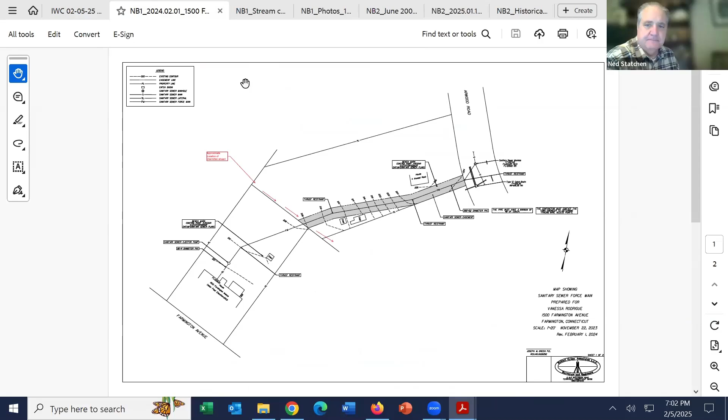Our first item on the agenda is 1500 Farmington Avenue. Is the applicant here? If the applicant can summarize, I know we got that cross-section sketch with a little more information, but just refresh and give us any additional information you've had, or a summary. Vanessa, either the applicant or her contractor, can give you a description, just a narrative of what's been going on.

I purchased my house in November of 2022. My installer at the time did an inspection during the buying process and determined that my distribution pipe was cracked. We went ahead with getting a tank only and a replacement of the distribution pipe. During that time, my installer said there was no leaching fields to connect to. We continued with soil testing in February of 2023 with Joe Green, and the Farmington Valley Health District was also there. We determined that my soils were unsuitable and the best option would be to connect to city sewer.

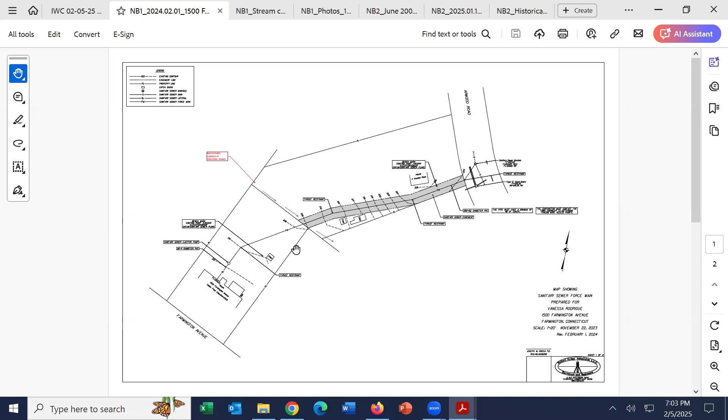There are no city sewers on Farmington Avenue, so I was lucky enough to ask my neighbor, who accepted to do an easement through their yard and connect onto the city sewer on Arwood Road in the Highlands behind my property. I went to a WPCA meeting in March of 2023 and they provided approval.

I took some time to get Joe Green to submit a plan to the town that was approved after a revision, and we've just been trying to get someone to do the work from then on. I believe it was approved in maybe February of last year. I might have the time wrong, but we've been looking to get someone to do the work. I was originally going to have Ben Bear from Bear Construction, but he kept pushing due to a big project, so I hired Fenn Construction to do the work. And that's where we are right now.

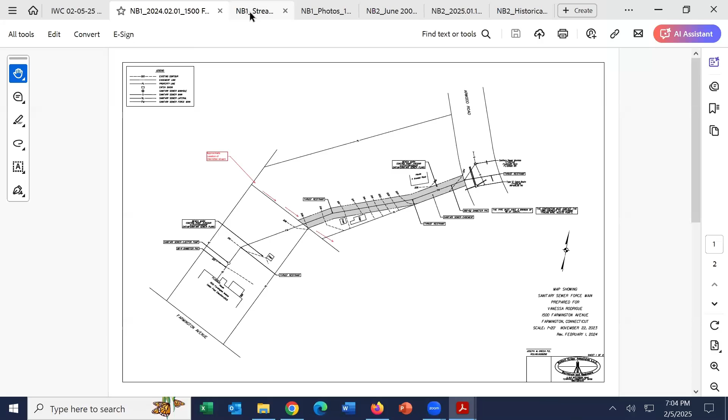And you have the full cooperation of your neighbor behind you that you're running the line through? Yes, I worked with attorney Pat Scully to get the easement documents obtained. They signed off, she's very aware. I keep her updated with every decision and whatnot that we have to go through, so she's very aware of everything. Okay, thank you.

Is your contractor here? I'm not sure, I sent him the link. I don't see him on the list. So I can give a brief explanation of his cross-section if you'd like.

From my understanding, he's going to be digging a trench 42 inches deep for frost protection. The pipe is 1 1/2 inch, and it's going to be connected to a grinder pump that's going to pump up; the grinder pump is located in the middle of my property, and then the topography goes up. He's going to be excavating, pushing that material to the side, and backfilling with that same material, and then he's going to have hay bales to keep it structured.

And then I also see he has, and this is on my property, Typar fabric that he's going to be laying above the pipe, and he also has sand and gravel on my property, so he's going to be backfilling with that first and then using the original soil that he excavated. I think we have an understanding of what you would like to do.

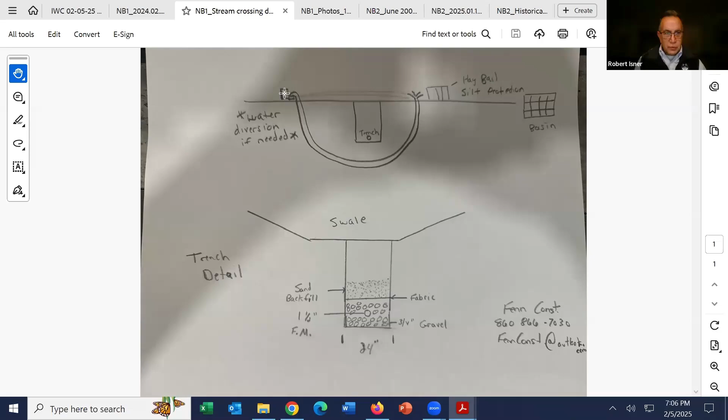Robert Isner: No question, just that we talked last month about basic construction practices, doing it during a low flow period, coordinating the work with the town staff, and using soil and erosion control to restabilize the area, so I don't have any concerns about the project. No comments. Neil Kelsey: nothing from me at this point. Mark Simpson: No questions. Jay Tulin: I also don't have any questions, it seems pretty straightforward.

The contractor was eager to get going but hasn't started any additional work away from the crossing swale. He took his excavator away after we got notified that we needed a wetlands permit, but we did have a hiccup where our sewage started backing up into our basement.

I assume it's due to the house sewer pipe being exposed. I had him come Saturday, and Farmington Valley Health District's Pat came Tuesday to check the pitch, but it started backing up into the basement and then into the shower. So he cut the original house sewer pipe and replaced it with PVC. I think the cause was a mixture of ice and roots growing into the original pipe. That's the only thing that's happened so far.

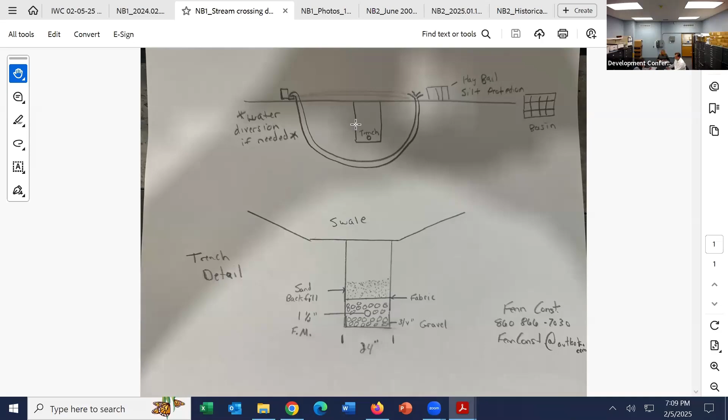So moved, Mark, with the conditions as stated in the review notes from the town. Okay, Mark, is that okay with you? Yeah, that's okay with me. I need a second. I'll second, Jay. All right, Jay seconds. The motion's been made to accept the application and seconded.

All those in favor say aye. Aye. Opposed? Abstain? Motion passes.

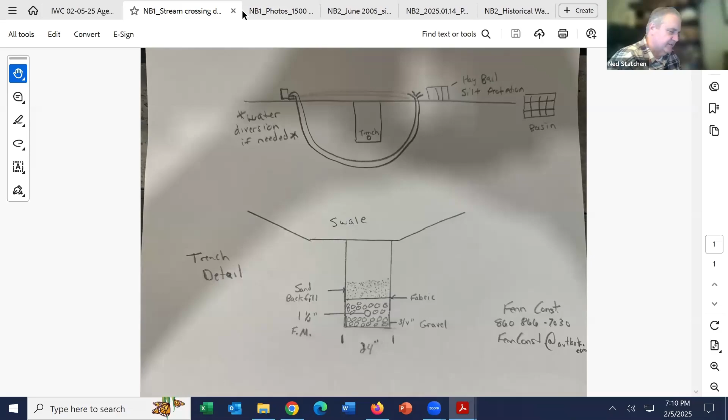Thank you so much, everybody. I appreciate it, and I will keep you all posted with my contractor and the work. You just have to keep Bruce posted as to when things are starting and give him a few days' notice before the contractor gets there, and work together with the town, and you should have no problems. Okay, thank you so much. Stay safe. Thank you.

All right, the next item on the agenda: Hillstead Museum, 35 Mountain Road, removal of invasive species work. Yes, we have David Perpeck from the museum on the line. Dave, are you there? Yes, I am. Can you hear me? Yes, we can.

Just a brief history: back in the early 1900s, this area was developed as what we call a walking garden, adjacent to the current sunken garden. There are some original photos from the early 1900s when it was active. Probably during the early or mid World War II era, when there were labor shortages, the sunken garden and walking garden fell to the wayside.

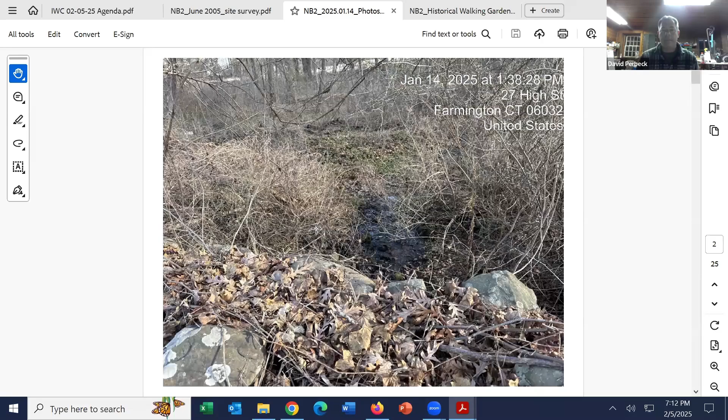So currently, I don't know if Bruce has a current picture, but it's completely overgrown with poison ivy, vines, any kind of invasive thing you could think of. As you drive down the driveway entering the museum from Mountain Road, you can see the house in the background, and everybody drives by this—at this point it's a pretty big eyesore. We don't have plans yet, but our goal is to eventually restore this to its former glory and give visitors another thing to do for walking, reflection, and spending time on the property.

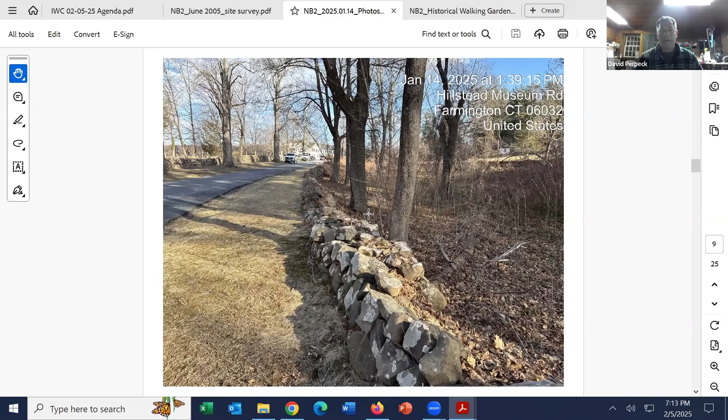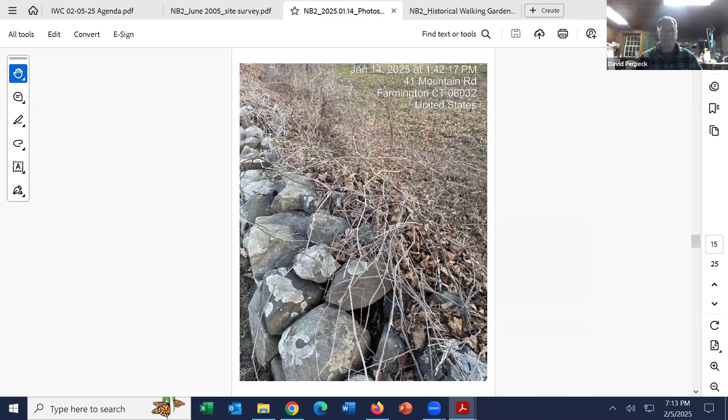We don't have an official plan yet, but our goal right now is to remove as much of the invasives as we can, clean it up, clear it out, and maintain it while we come up with a plan with a landscape architect and put some numbers to it, figure out what this will cost, and start raising some money. We do have some current funds now to do some clearing and removal, but there are stone walls that need to be repaired. It's a big project, but we want to clean it up to make it more presentable and let people get in there to assess it, put numbers to it, and come up with a plan, which we'd bring back to you at a future time. We don't have a time frame yet, but we'd come back with a formal application once we have a plan established.

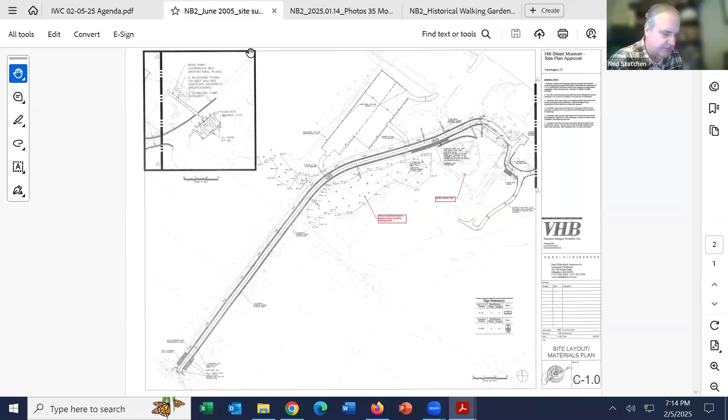Bruce, do you have anything that shows where the wetland area is, in regards to the area they want to do some clearing? All right, here it is. So Mountain Road is down here, here's the long access drive coming in, here's the house, and the sunken garden is up by the house. This is the area right around that bend in this area.

Wetlands were flagged - I think it was back in 2005, when we did the road work here. Yeah, 05, as part of the plan to redo some parking in here. So as part of that, they did this wetland flagging in that whole area, and that is the whole area of the walking garden at this point, not the sunken garden.

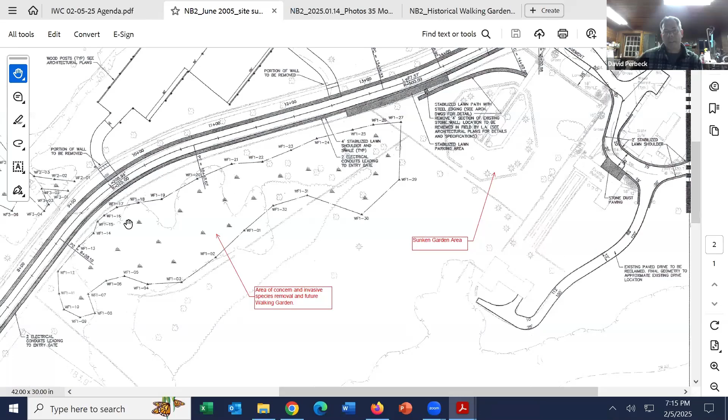I know we walked in there, and the most northerly, probably the first 60 or 70% of the walking garden, the north side, is usually always really dry. I know it's still designated wetlands. To the southern end is where there's the culvert that goes under the road, and then there's the easement that goes down to High Street.

I'll give a little aerial view. So there's the sunken garden there. This is the sheep meadow, a field for the sheep. Here's the old walking garden, and there is an intermittent water course that comes down through here, runs along the edge, goes under the road here, and then meanders down into High Street at this point.

Is part of your removal going to have anything like a mini excavator? No, I think it's going to be a mixture of handwork, and my contractor has a mini excavator with a small grapple claw on it with rubber tracks. We're thinking now is the time to really do it based on the ground and soil conditions - it's dry, it's frozen. In the spring it gets much wetter in there. So most of it can be grabbed from the high side, and we can sneak around where that main wet area is, and whatever we can't get with the excavator, we can do some handwork as well.

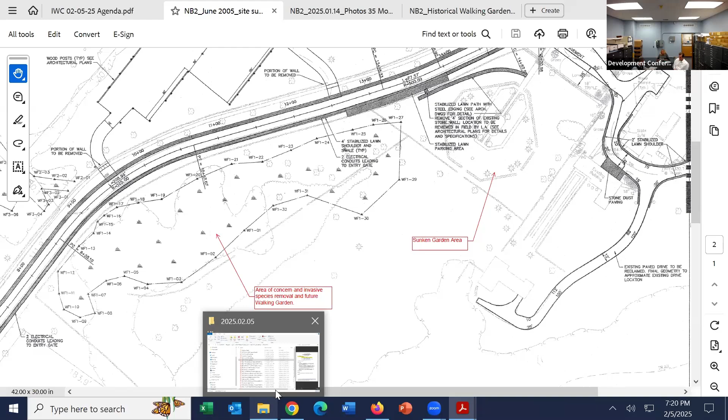What the intent of the application right now is just to remove the invasives in this area, that's it. That's all they want to do right now, because they did get a donation to do some preliminary design on this. So they want to get the invasives cleared out so they can at least see a little bit better what needs to be done, the amount of work, and then from there come up with a plan. And as we said, they'll be back at some point in the future with a plan, with an actual application for the full rebuild of the walking path.

Okay, that's the only questions I have. Thank you.

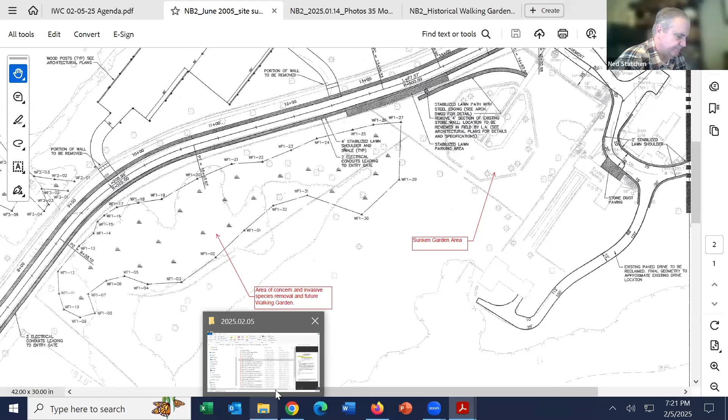I don't have a problem with having this as a non-regulated use, particularly with frozen ground conditions. So get it done as quick as you can, I guess.

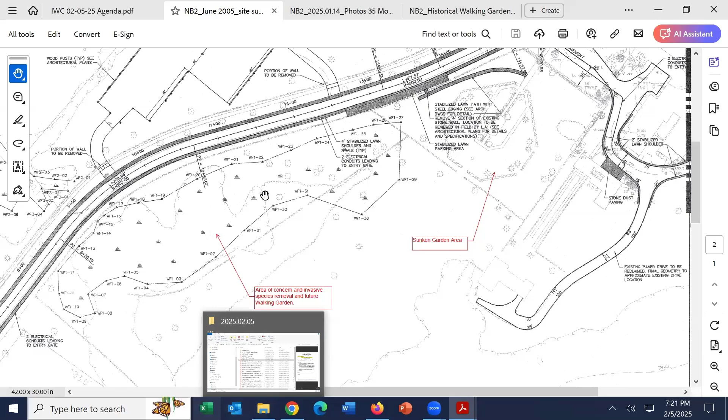In the long run, this is supposed to be a walking garden, and I guess it's called a forested wetland at present. Is it going to be shade species, or is there going to be some clearing that has to be done to support a garden? Something to think about as this progresses.

Yeah, there are many trees in there. There are definitely a couple that are not in great shape. So, yeah, I understand your point.

Okay, and when you come back with a plan, maybe 20 years is quite a long time. You'd probably do another wetland delineation and have the scientist give us the functions and values of what the wetland is. But that's for the future. What you're proposing now is fine.

Thank you. Thank you, Dave. Robert Eisner.

We come back to Robert. Yeah, sometimes his screen freezes. Let me see, is he muted? Yeah, he's muted. All right, Neil Kelsey. Oh sorry, my fault. No problem.

Go ahead, Rob. Conceptually, I agree it's an as-of-right activity, but Bruce, is there a limitation on the acreage that falls under the exemption? Not for this section. Let me grab my book. Hold on. Okay, and that's for checking the incidental use, that's for like incidental use such as a pool or anything like that, here, 4B.

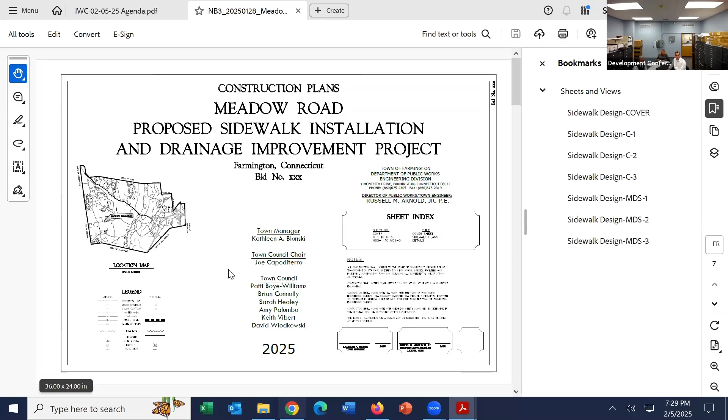Okay, next item, Town of Farmington, Meadow Road, regulated activity in the upland review area for sidewalk project. Is that gonna be you, Bruce, or is it the engineer? Nope. Good evening, commission members and chair. My name is Dylan Riley. I am one of the civil engineers for the town. I'll be presenting the Meadow Road project tonight with the highlighted focus on the 3 areas where we cross the wetlands.

The Meadow Road Sidewalk Project is a sidewalk project building a new sidewalk stretch from New Britain Avenue to Wisteria Lane. We will be crossing Judson Lane with new ramps. There is one culvert crossing that requires our attention. As part of this project, we plan to upsize the outlet end of the pipe only, from a 36-inch RCP pipe to a 48-inch RCP pipe.

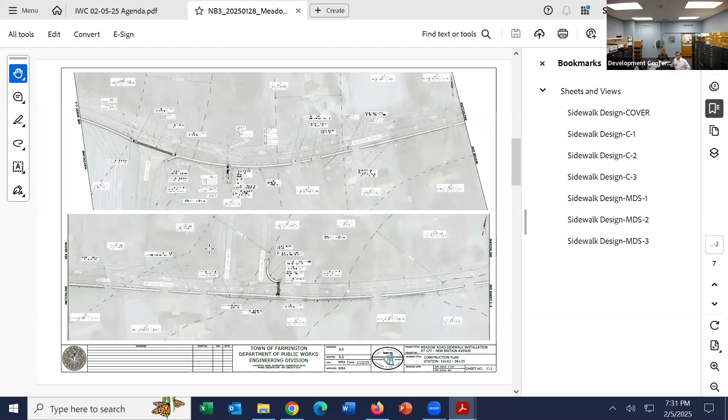Could you go to the plans? Thank you. Throughout the project, we cross the wetlands at 3 points.

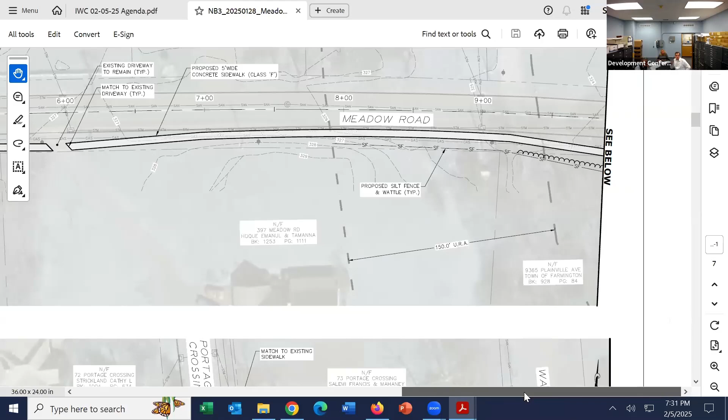This is our first crossing where we start at Wisteria Lane. We enter the Upland Review area at Station 8. Station 925 is roughly where the wetlands start. In that area, we have to pull back the sidewalk from the road a little bit due to elevation change just off the road, so we'll be utilizing silt fence and straw wattles to contain any disturbance and erosion within the project limits and off of the greater wetland. There are a couple of utility poles in our way, forcing us to move further away from the road in this area, that accompanied with the grade change, as drastic as it is, so close to the road.

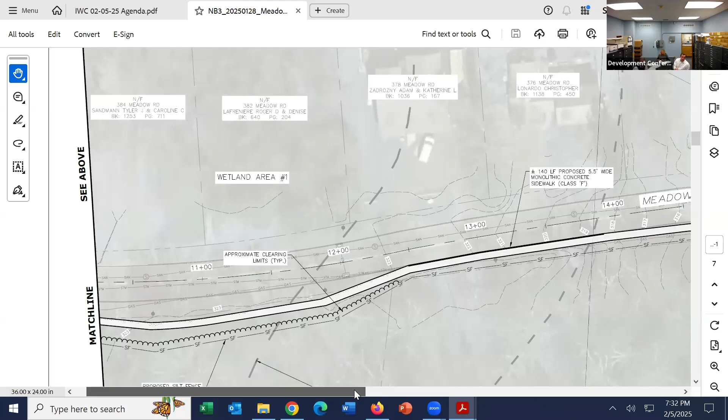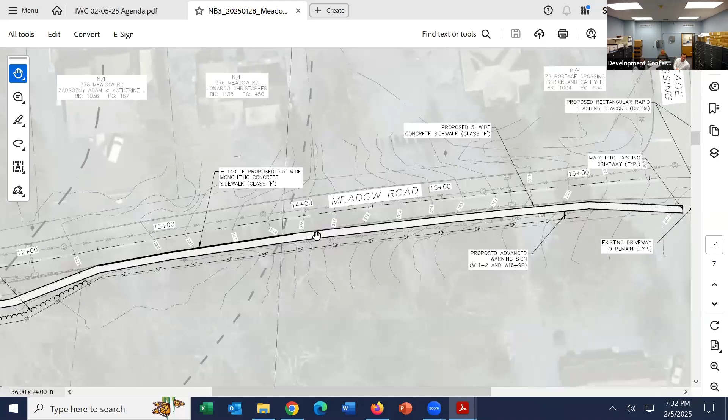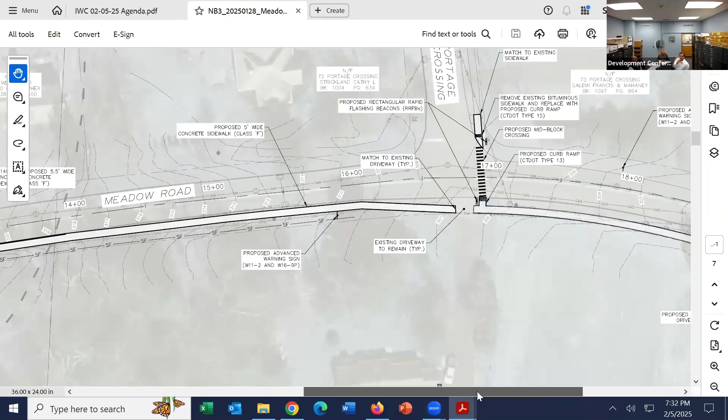We move out of the wetland review area at station 12 and out of the upland review area around station 14, where we're able to come back to the road. We then continue along the road for the remainder of this stretch till we reach our next wetland around Judson Lane.

At this particular point, around station 21, we enter the upland review area. Around station 2250, we are in the wetlands area. At this area, we are pushing the sidewalk as close as we can to those utility poles to keep it away from the edge of the embankment for the road.

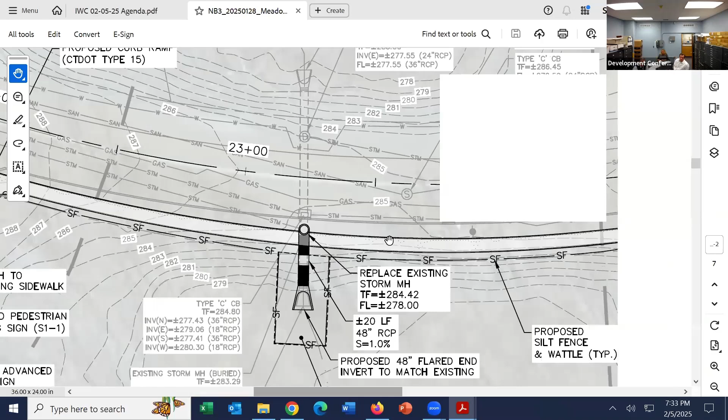Fill will be used as required during any field work. Silt fence and straw wattles will be utilized to contain all loose material onto the project site and within our green belt. At this location, this is where our culvert crossing is. This culvert accepts a lot of water from Summersby, Portage Crossing, and elsewhere along Meadow Road.

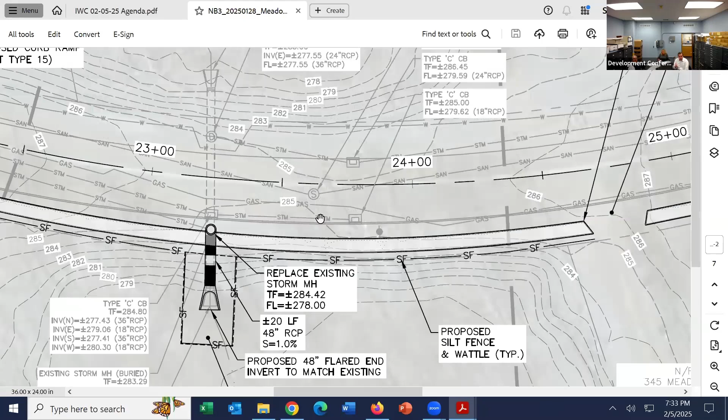Oh no, I put the wrong application, sorry. That's right, photos for here, we go, right here. Storm drains outlet, here we go. That's what I was looking for.

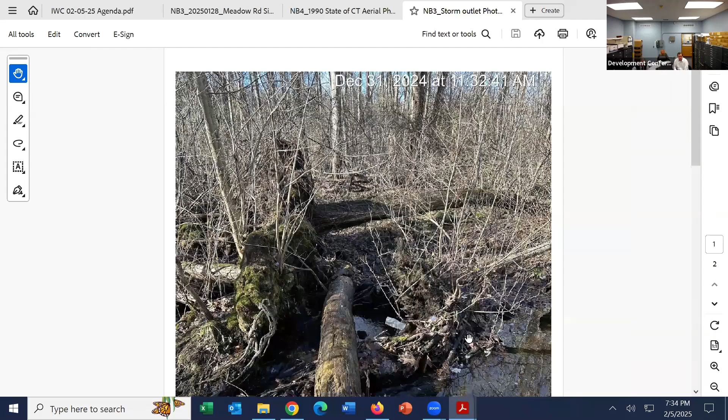These are primarily downstream photos, probably 50 yards from the outlet. You can see it's a small, really intermittent water course. It doesn't really flow all of the time. In fact, just recently, the inlet was completely frozen, so the water's not flowing through there very fast at all for it to freeze, and it froze pretty solidly. I myself was walking on it at the inlet.

The outlet that we plan on doing the work to is being done to reduce flooding on the northern end of Meadow Road. The property there has a shed that sometimes can get inundated with water during high volume storm events. It's the shed right there at the end of the driveway, Bruce.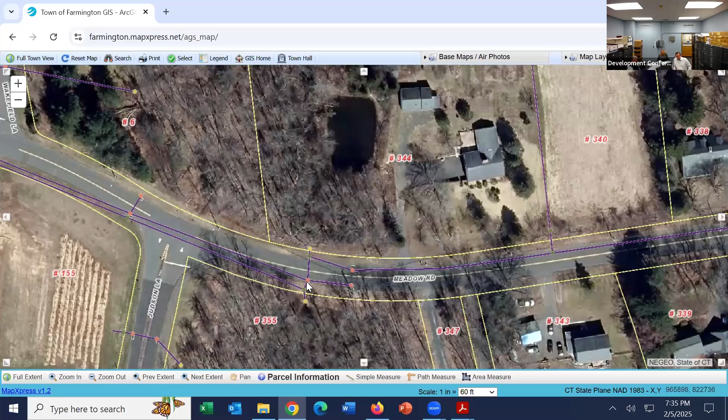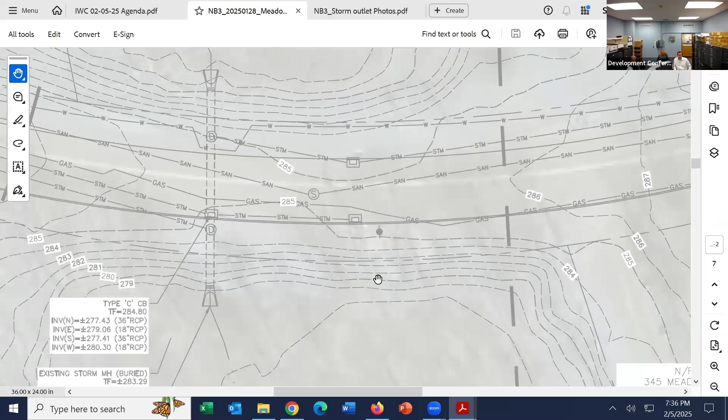The reason we're only upgrading the outlet pipe is because from Portage Crossing, there's a 36-inch, the most southern storm drainage line with the green dots, is a 36-inch RCP pipe coming from the Portage Crossing development. That intercepts the 36-inch RCP crossing at that green manhole. The green dot indicates a manhole structure. So we'll be changing out that manhole structure with a larger structure to accommodate the 48-inch pipe, and upgrading the outlet to provide more relief on the outlet side with the 36-inch pipe coming from Portage Crossing, to relieve any backup from before that point.

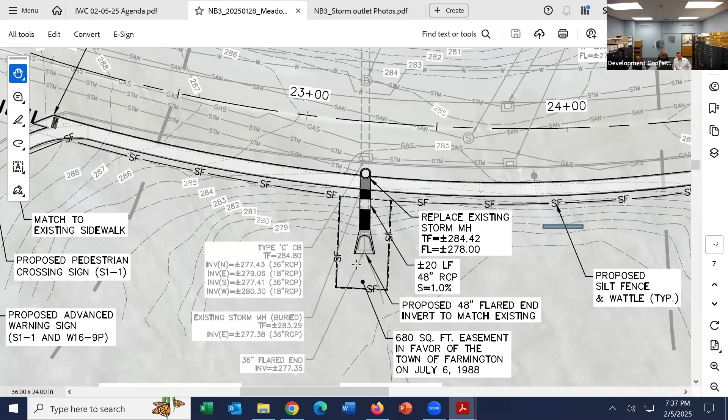So the regulated work here is really just removing the existing pipe, flared end and manhole structure and placing new structures in. The new pipe will fall in the same footprint as the existing, just a slightly larger size. We will not be doing any work in the plunge pool. The plunge pool existing is heavily silted in; in talks with CT DEEP Fisheries, that's how they prefer it. They actually prefer us not to put riprap in any body of water really anymore for fish passage. So that work will not be done as part of this project. We will just be upgrading the outlet structure.

Is that flared end concrete or plastic? All components will be concrete. Okay, yep.

And oh, I'm sorry, continue. No, it's fine. And then just wrap up and show them what you're doing with the rest of it.

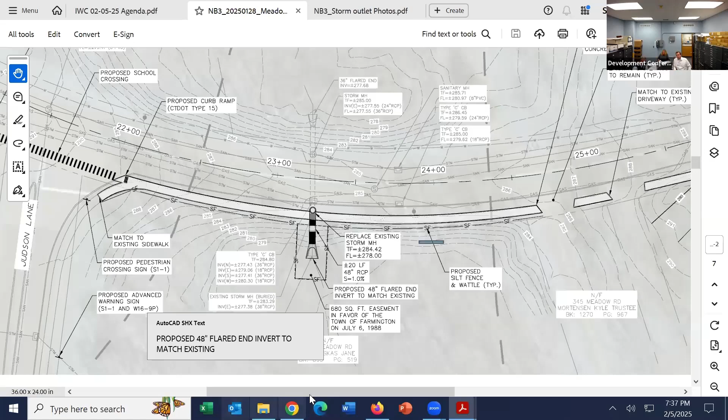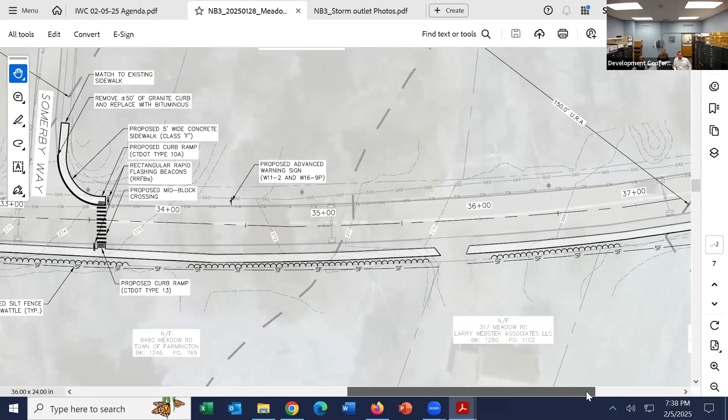That's all, we have one more crossing a little bit further on. This is just the upland review area after the pipe, but we have one more wetland crossing before we make it to the end of the project, just along this stretch in front of Somerby Way. Again, we'll use standard construction practices to keep erosion within the project limits and out of any unnecessary disturbance.

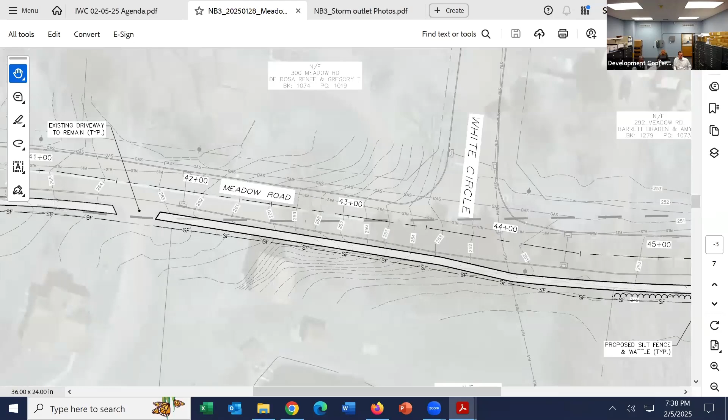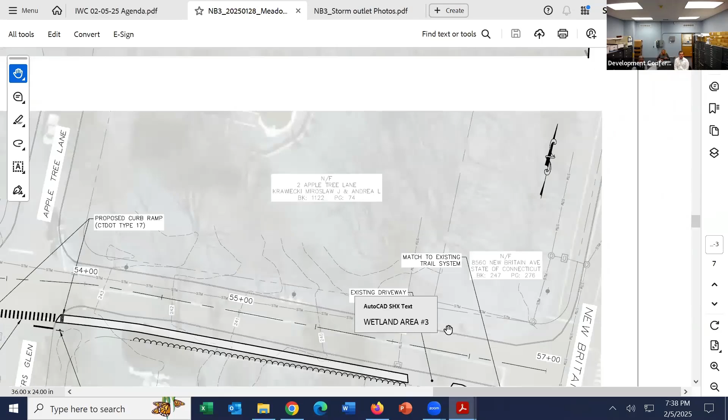No problem, and then this takes you to the end. Go back to here, crossing by Apple Tree, right? Yep, Apple Tree, and then tying right back into where? The trail, like right there. So, yep, so that's our project proposal.

At this point, I'll leave it to the commission for any questions and comments.

When do we think this work is going to be scheduled? It's our intention to go out to bid shortly, hopefully scheduling the work for sometime after end of school. Okay. All right, I think that's all I have.

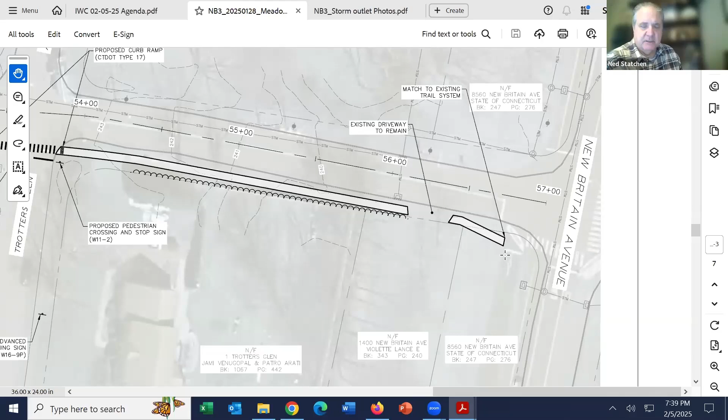We'll start with Rich Berlandi. Do you have any questions? No, it looks pretty straightforward. No questions, thank you. All right, Dave Fox.

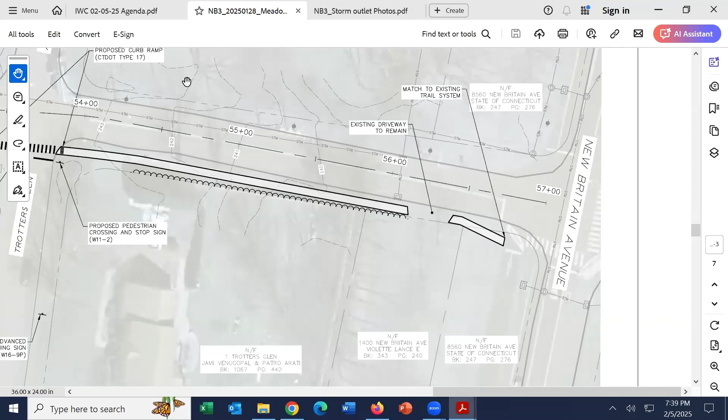Just kind of one picky question. I see on the application that it's 680 square feet of wetland impacts, but I think that's just counting the storm drainage area there, and you do have some crossings that probably aren't counted into that. And being on the side of the road, maybe they're really not wetlands anyway, but I don't know how that's handled from accounting purposes. It's not an on-ground field here, it's just the aerial wetland.

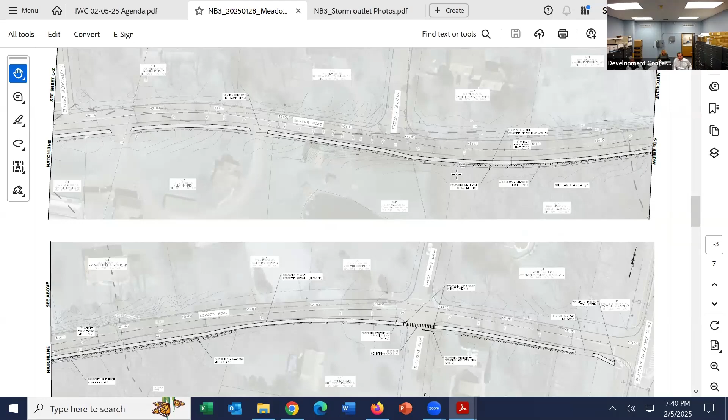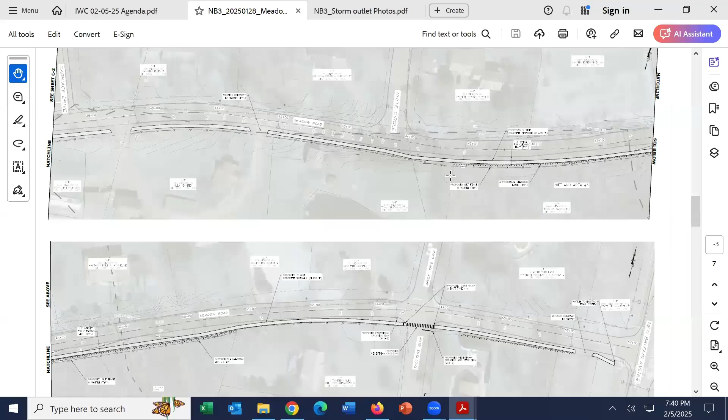Yeah, so our wetlands delineation is really just through the aerial views from the GIS website that we have, and the GIS mapping. They're not necessarily flagged, but the rough idea is that when you're that close to the road... Yeah, I understand. And I was looking at that, GIS shows pretty much all of Hind Farm as wetlands, so it's obviously not correct. Yeah, so again, no big deal. I didn't know if it was an accounting thing, but probably doesn't matter.

Yeah, we're really staying within the green belt along Meadow Road. We're not, apart from that one area where we separate from the road a little bit more than you normally would, but that's only because of how much higher the elevation along the south side of the road is compared to the road itself. Okay, it's much more cost effective to go up with the grade than it is to remove the grade. Okay, I'm done, thank you.

Thank you, Robert Eisner. Yeah, I think it's going to be a highly beneficial project for public safety purposes. I bike and walk on this road all the time. It has an east-west run, and when there are people on the road in the morning and at night, the sun is blinding for the driver. So I think it'll be a major public safety improvement to get people off the road, and so there's a small amount of wetland impact that may occur, but it's far outweighed by the public safety.

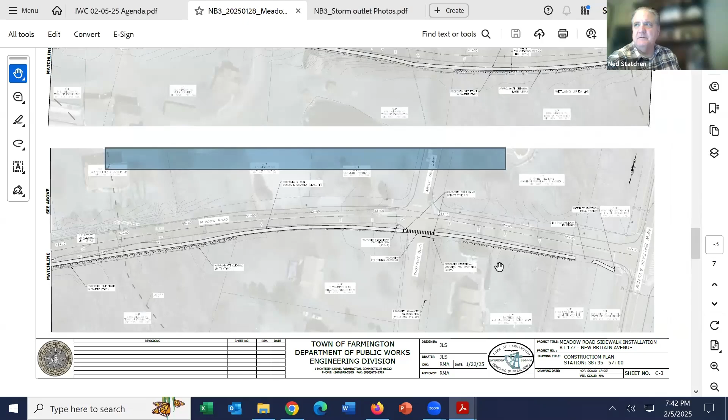I do have one question. Just west of the intersection with New Britain Avenue, it shows there's an existing driveway to be maintained. There is no driveway, go back to your on Meadow Road. Just a second, sorry. Yeah, when you have the profile sheets, you show that there's an existing driveway to be maintained. I think there used to be, when they first built that storage building.

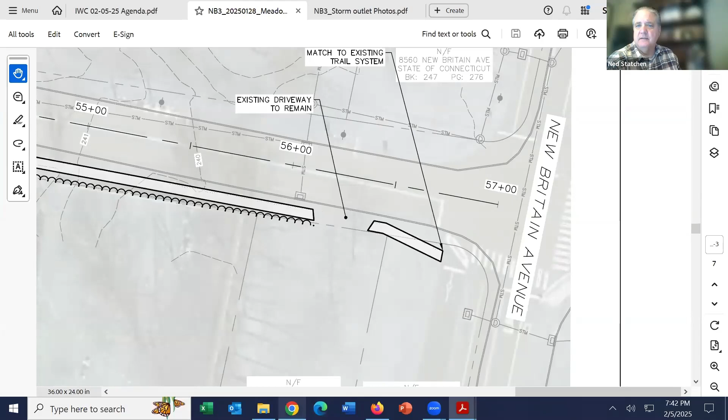But I think they've since, probably for security, so you don't have a one way out, one way in. Yeah, that's all grass. I mean, I've lived there for over 20 years, I don't think it's there anymore, never seen any vehicles. There's no gravel, no sign of any driveway. It's definitely gone, but if there's no sign of any remains of a driveway and there's no curb cut, then there's no reason to... Nope, there's no curb cut there. Good pickup, sir. Yeah, thank you.

We'll be filling that in with concrete for the sidewalk. Okay, end of my comments.

Hey, Neil Kelsey. Yeah, nothing from me.

All right, Mark Simpson. Yeah, I just was trying to read the application and I was a little concerned about the areas of wetlands being disturbed, but I think in this discussion it made me more reassured that if it's going by what's flagged by the town, by the GIS, I know those things it's not accurate unless somebody actually goes in there and does an evaluation, whether it's wetlands or not. So I'm pretty much okay with this project, for what the benefits are outweigh any disturbance. I agree, that's all, thank you.

Jay Tulin, I don't have any questions. I agree with all the beneficial, the benefit outweighs anything else, and I think it's a good project. Thanks. Okay.

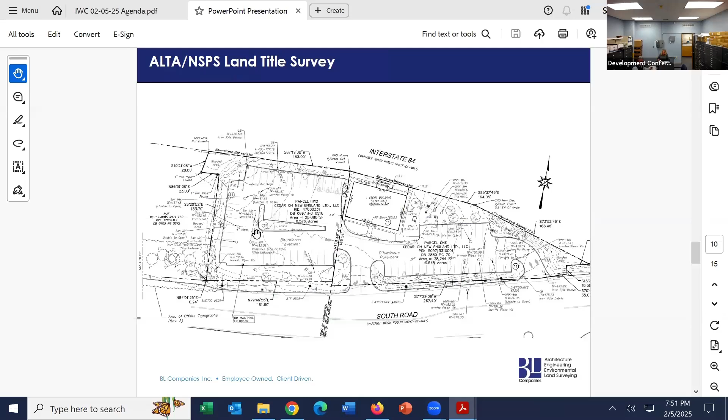So this is just the survey of the site as it appears today. We obviously have that existing Wendy's building pushed further back towards I-84, which is to the north side of the site. The parking lot is located to the front and sides. Half of the lot is located in Farmington, and the easterly half is located in West Hartford.

We did receive a permit from you back in 2022 for a drainage pipe located in that northwest corner where Bruce is circling right now. That water sheets flows out to the west, which is a current lot owned by the West Farms Mall owners, and it's in a conservation easement. So it's been wooded for quite some time, and that's where our stormwater from this site will be directed.

We are proposing to rebuild this whole site. That Wendy's is very original and outdated. If you can go to the next slide, please, Bruce.

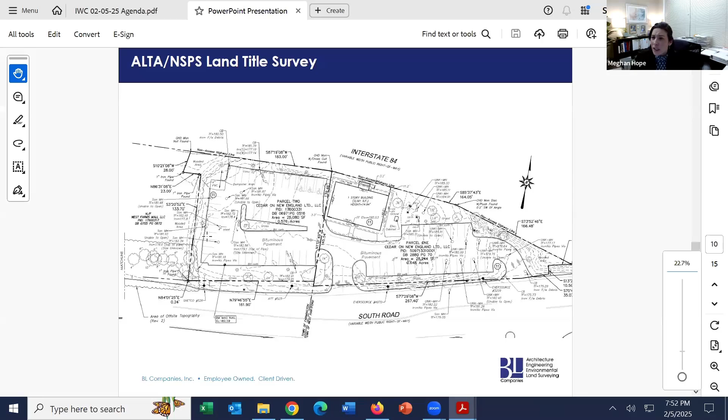Our proposal was approved by all the boards in Farmington, and then we went to West Hartford and got all the approvals we needed over there. But we're obviously pulling the building closer to the street. We don't need as many parking because there's less indoor seats now. We are proposing a drive-through, but this has all been approved and permitted.

When we did get the plans approved, the original proposal included getting rid of the existing septic tank, which is currently on site, and connecting the site to the sewer. We did get permission from Farmington to connect to their sewer, which is down to the westerly on Woodruff Road. It's about 600 linear feet of pipe in order to connect, but the client thought it was important to abandon the septic tank and move towards a sewered option for this site.

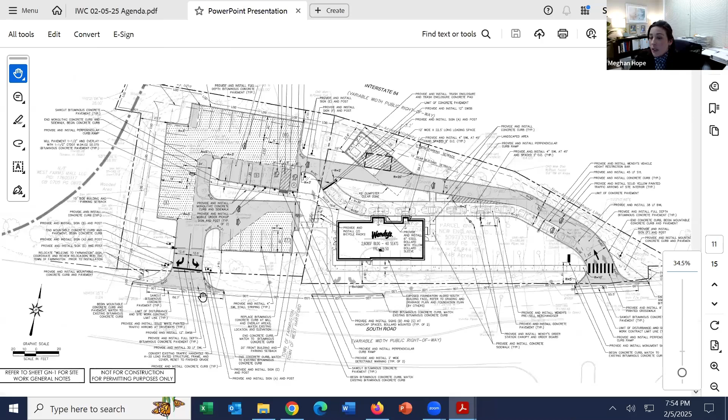Our original proposal had that sewer pipe located in South Road, so all within the pavement. And what our application tonight deals with is a change to that previous plan. What we're proposing to do is to put the sewer pipe within the adjacent lot. If you go to the next slide, Bruce, that should show it.

Yes, this one, thank you. So this is just, we were looking at the Wendy's site, and this is to the west. So we've slid down further towards Woodruff Road. You can see the parking lot over on the right side of the screen.

That'll be our new parking lot, and that outfall pipe that you permitted back in 2022 just clipped the limits of the 150-foot upland review area. So that red line that you're seeing on the plan is where we're proposing to locate the sewer pipe. The easement is 30 feet in width, and I'll have Gareth in a minute go through some of the more technical parts of it, but we would be proposing disturbance, obviously, within that upland review area.

There is some vegetation, and that would need to be removed in order to put the pipe in. We did have the wetlands delineated. Sagan did that in April, and those have been field located and placed on the plan. It's about 60 feet from that closest point of the wetlands to the closest limit of disturbance.

So in all, it's about 12,700 square feet of disturbance, which is proposed in the upland review area. There is no direct wetland impact or direct disturbance to the wetland soil. In a minute, we'll have Sagan go through his findings. He did do a function and values analysis. He also did review the site to see if there was a vernal pool, and he determined that there is no vernal pool located at this location, but he's submitted all those reports to the commission.

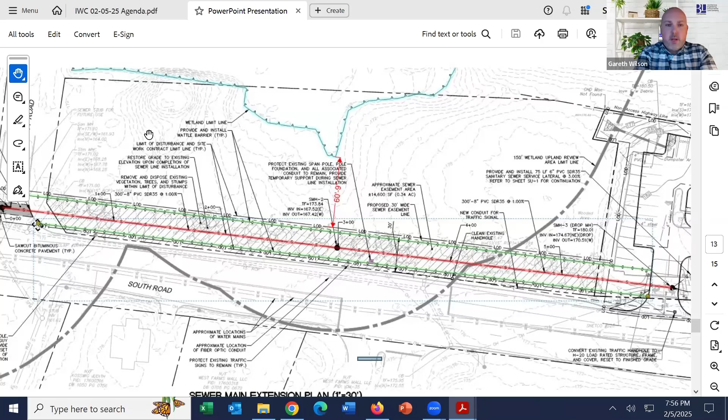Sure, thank you so much. Bruce, would you mind going back to the second slide?

Here we go. Perfect. So this is the area of proposed works.

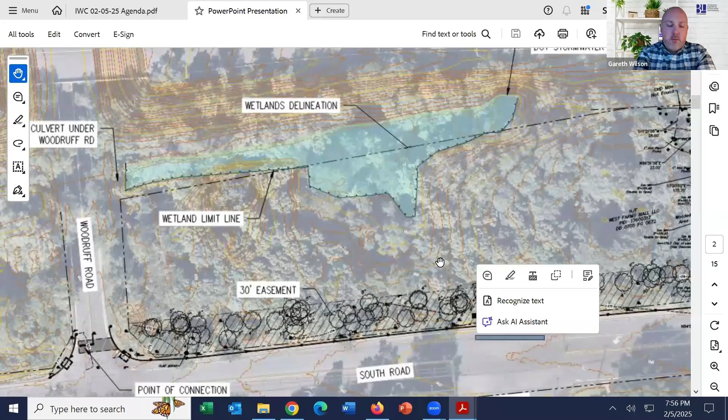We're hugging the road for a 30 foot easement along the length, approximately just shy of 600 feet. It's 600 feet chamber to chamber from our side to the point of connection on Woodruff Road.

As you can see to the north, and you're probably all familiar with, Interstate 84 drains down the south side, just off site of this parcel of land there, correct? And travels along heading west.

The ground also drops towards the center there, where you see the wetlands highlighted in blue. And like Meghan pointed out, we're about 60 feet from that proposed area of works. But just to give context, most of the water flows from 84, and of course some from the site as well.

Bruce, would you mind going back to the previous plan, showing the sewer in red and green and yellow lines? I'll let Sagan talk through the photographs and his findings.

So it's really 600 feet sewer connection, 3 chambers connecting on Woodruff Road. Previously, we were to connect just south of that connection point to a stub on the private piece of land, 9520 I believe it was, just south of, further left and south of where your cursor is.

So all the works were previously going to be proposed in the road. From a traffic management perspective, it's quite challenging - several junctions, a long stretch of road, and also beside West Farms Mall, so it wouldn't be ideal.

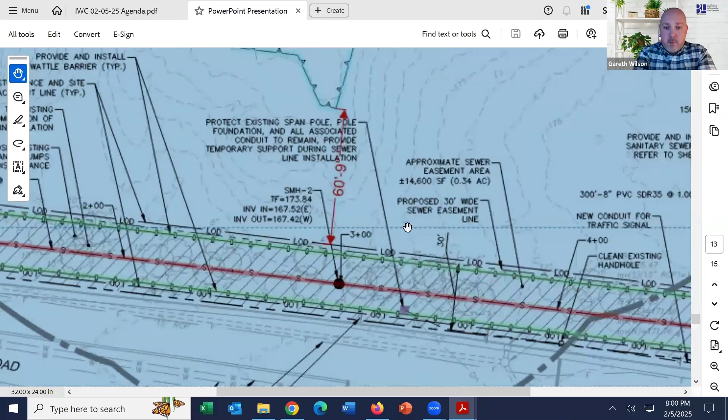There's one little obstacle there. If you see the central manhole, to the right of that, there's an overhead and a span pole in that location, about 6 feet away from our proposed trench.

So we have made a note there for that to be temporarily supported. We weren't able to find an exact detail for that, but looking at DOT standard details, we expect it to be around 6 feet, if not deeper, in that area, which would be deeper than the sewer is actually in that area. Our sewers range from 8 to 6 feet in excavation throughout that area.

Either side highlighted in green, the fence type is straw wattling, which we proposed for sediment erosion control. One of the staff comments asked us to consider silt fence. We're more than happy to add that to the plans, but we haven't updated the plans since submission, so we can certainly have that as a condition of approval.

Really, it's fairly straightforward in the amount of works undertaking: 600 feet linear trench, 60 feet from the wetlands, sediment erosion control, best management practices of course, and a shorter construction duration and less impact on the surrounding neighborhood and traffic.

I'm happy to answer any engineering questions now, or I can pass to Sagan to talk through some of the site photographs, the wetlands, what his findings were.

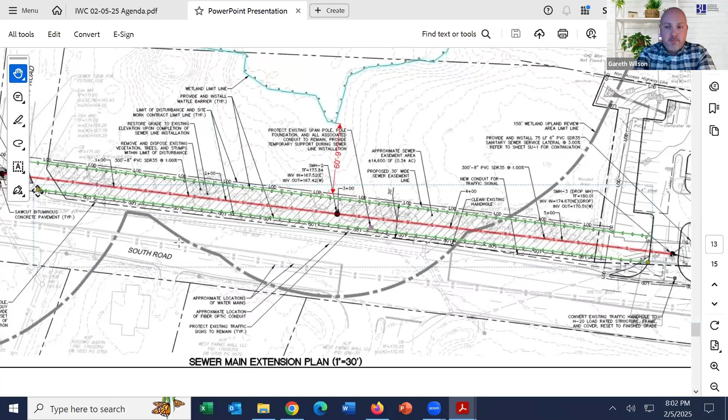Let me just let you continue, but I just want a clarification. So in 2022, the application was to utilize or replace the septic tank and use an on-site disposal, and now you're going to hook up to the sewer line.

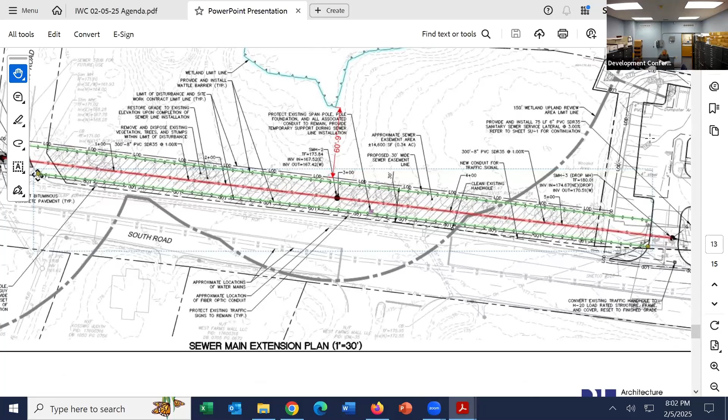Sorry, existing has a septic system. In the 2022 approval, we had the sanitary connecting from the site, connecting across to the left-hand side, similar route, but entirely in the road. So what we're looking to do is get approval to move it from the road into the neighboring lot, which is in the upland review area.

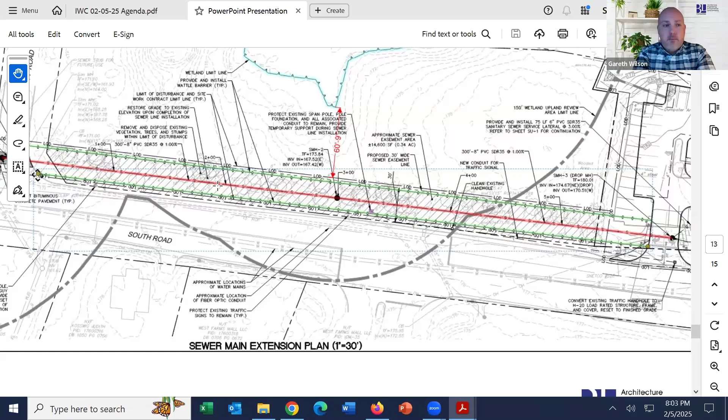Okay, thank you. Continue, please. I'll pass to Sagan, if you can walk through the photographs and your findings, please.

Sure, my name is Sagan Sumko. I'm the certified professional soil scientist and professional wetland scientist who worked on the site. If you want to go ahead and go to the photos, we'll go through them.

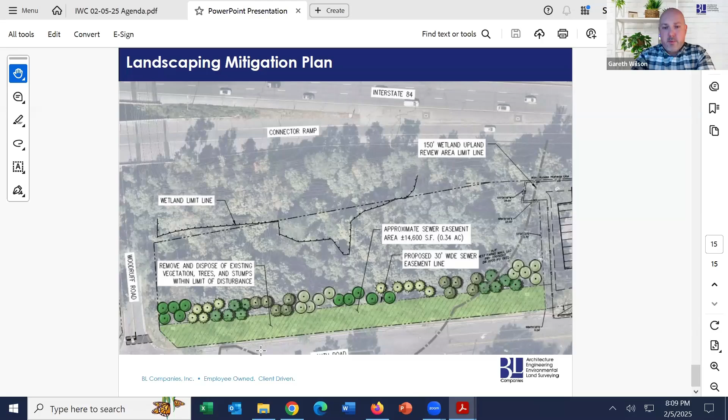Gareth, what is the proposed seed mix that's going over the easement? We obviously can't plant trees on top of the sewer easement, but is that going to be mowed a couple times a year, or is it like a meadow mix? I wasn't sure what we had been proposing there, but it'll be no trees in that area, correct? Correct, no trees. All the trees are outside of the easement area, so there's no intrusion of roots for any future maintenance issues. It will be a grass area.

Seed mix, yeah, it's a lawn seed mix. So the mix is Kentucky bluegrass 60%, fine creeping, fine leaf 25%, and ryegrass 15%. So a hybrid mix of grass, which can be mowed and tended as needed.

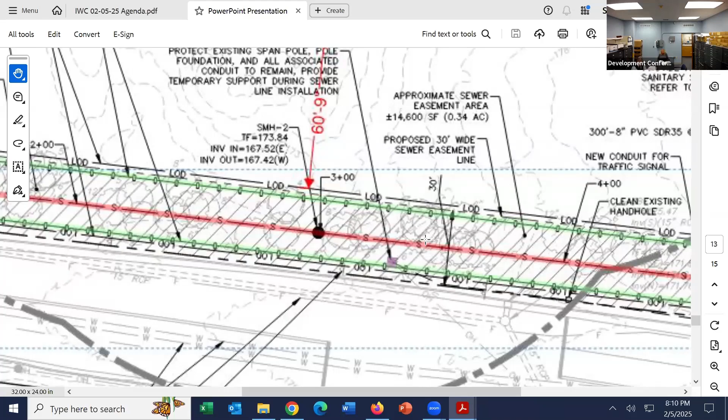You're probably talking about 35 to 40 feet off of the back of the curb. So I would assume that half of that would at least be mowed by the town, maybe during the roadside mowing program as they're going through. Because just as Commissioner Berlandi said, they would be maintaining this sight line at the intersection of Woodruff, so they'd want to keep this mowed through here. So I don't envision it really being a large maintenance project. Just keeping any kind of trees that may grow up through there in the future.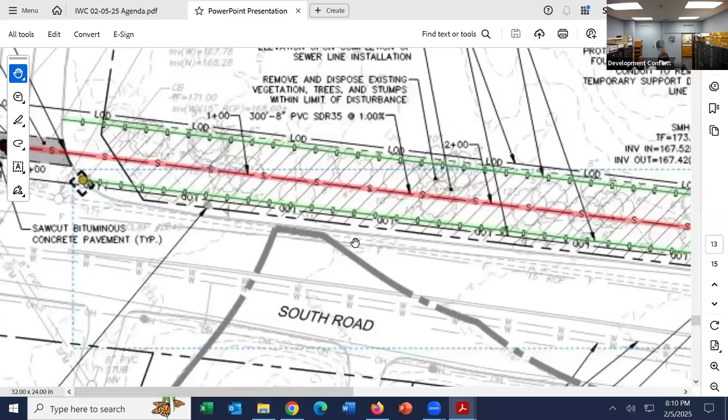If you don't mind, I do want to interject on one thing while we're talking about the easement. As we said, the easement's not in place at this point. What happened, and I summarized it in my agenda review, is this whole property was purchased by the mall during the expansion in the 90s, and a conservation easement was placed over it. So the full property has a conservation easement over it, and in there are some restrictions regarding any tree clearing and regarding any utilities.

So what's going to happen here, I think in two parts, is I'd be looking for the commission, if they do approve this, to make a recommendation to the town council to modify the easement. So then this has to go back to town council. Town council will have to work with the attorneys to modify this conservation easement to allow this 30-foot sanitary sewer easement in this conservation easement area. I just want to make sure everyone was aware of that as we go forward with the discussion.

Well, I kind of see it, it will shorten the period of construction. And also, along with the sight line looking down to the east from Woodruff Road, there could be sightline issues with the parking lot there. I don't know if that's an entrance or an exit. I think it's two ways, yeah. So I think it's good to have that sight line cleared there as well, and it is very overgrown with invasives.

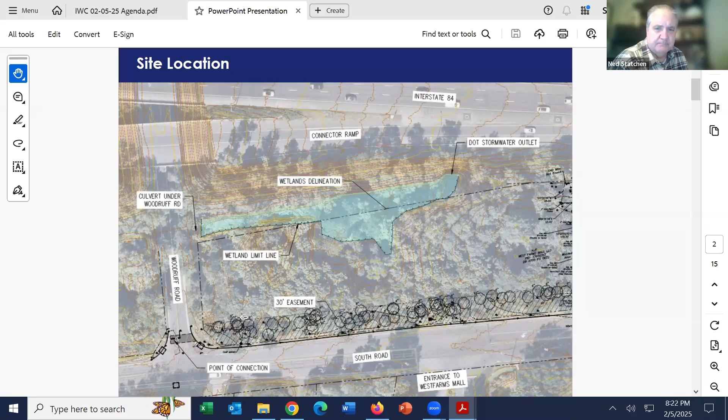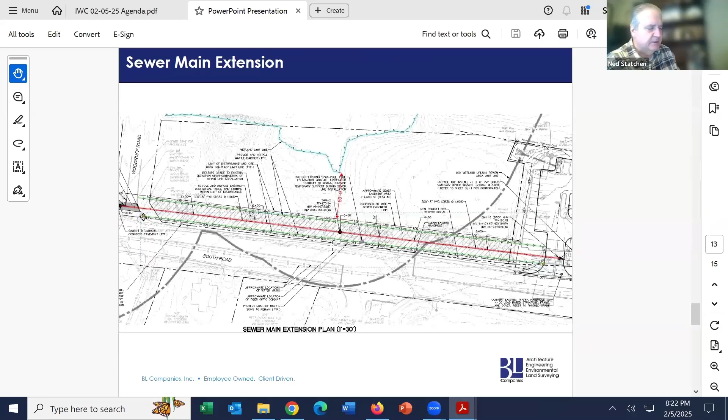I'm kind of along the same feeling as Robert Isner and Neil. Part of my question is, where do we get to 30 feet? I've seen, as a civil engineer, a lot of work being done in much narrower areas, so I don't know why they need the whole 30 feet. Maybe something a little more narrow could be looked at. I do think there are benefits here in regards to the traveling public being less inconvenienced.

And also, I think the sight distances for Woodruff Road and the exit out of the parking lot will be better. So there are two different things, and I do think I would like to see a site walk here. I know it's not the best time of year for a site walk, but we should still be able to get somewhat of a feel. So I think I would like to do that.

But my question is to the applicant: what's the feasibility of having a smaller sewer right of way? Gareth, we had originally started with a 25-foot easement, correct? And we got some feedback from staff to make it a little bit wider. Could you talk through that, Gareth? Why we did that, and if it'd be feasible to go back to something a little smaller?

We could go back to something a little smaller. We did start with 25 feet. It seemed reasonable. Just keeping roots away from the sewer itself was one of the main drivers for that. That's the big problem there. We want to give enough space around the span pole itself, but that's not to say we can't pull this in in other areas and adjust our placement of it. We'd certainly be probably as wide, or maybe slightly a few feet less, in that area, and then try and taper away to the sides to reduce the impact. It's something we can certainly look at.

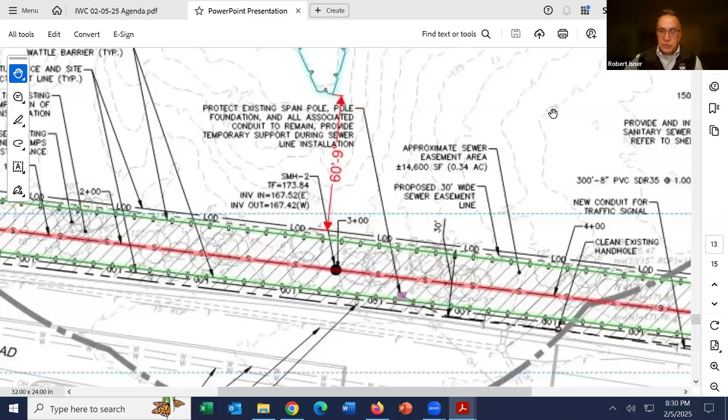Yeah, Bruce, and I'll speak first, Mr. Chair, if you don't mind. Sure. I was thinking the vernal pool only, the work is all in the upland review, and from my perspective it really comes down to if that's a functioning vernal pool, that compounded with an existing conservation easement would be very difficult for me to see where this is a viable proposal. If it's not a vernal pool, you still have a 60-foot separating distance from where the sewer line is going through to an active wetland. I think that's a very different scenario. So Bruce, my perspective is just assessment of the potential vernal pool area. Perfect, thank you.

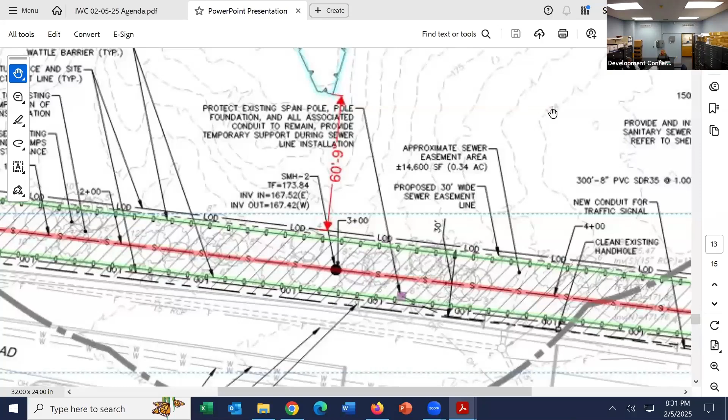Okay, where did I leave off? Neil?

Is the question just around the vernal pool? Yes, I would like to see a site walk, and I agree the focus would be on the vernal pool for additional analysis. You already spoke to thinking an independent soil scientist would be appropriate. Okay, focused on the vernal pool.

Mark Simpson, I'm all for the site visit. Jay Tulin, I definitely would like to have a site walk. I'm in agreement.

So we have unanimous polling that a site walk is required. We'll have to work with Bruce and let Bruce talk to the applicant about our timing and within our 65 days.

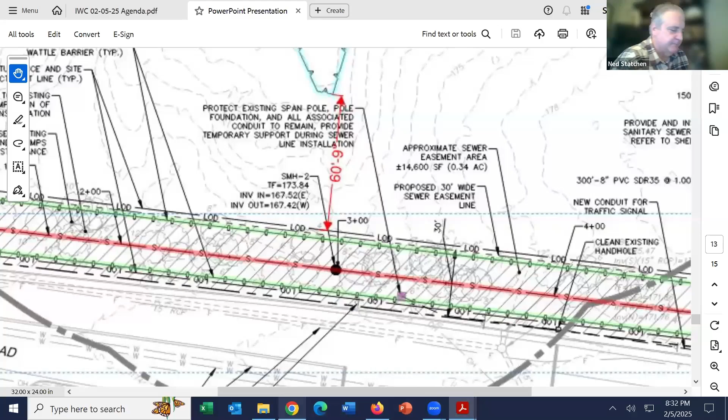I have mixed feelings on this because the overwhelming majority of water in this is just roadway runoff from I-84. So as regards the quality of the wetland, and being adjacent to the highway, I don't think it's an ideal wetland environment, but I am interested in if there is a vernal pool, and I am interested in a site walk. So we'll go ahead and Bruce, you can schedule that site walk for us after some discussion about what I'm thinking.

Do we need a vote on hiring a soil scientist to represent the town? Yes, that's where I was going. I think we don't have to vote on that. What I'd like is a vote on us getting a third party. There's a lot of work I need to do on my side. Once we get the proposals together, we'll work with the consultant, and then at that point we can have a vote on hiring the consultant. But I just want to get a vote that we agree there is a third party required, and that's the route we want to go.

I'll entertain a motion to instruct Bruce to make arrangements and figure out what we need to do to get a third party to review the site. So moved by Isner, and I will second. Motion has been made and seconded to investigate getting a third party to investigate the site. All those in favor say aye. Aye. Opposed, abstain - motion passes.

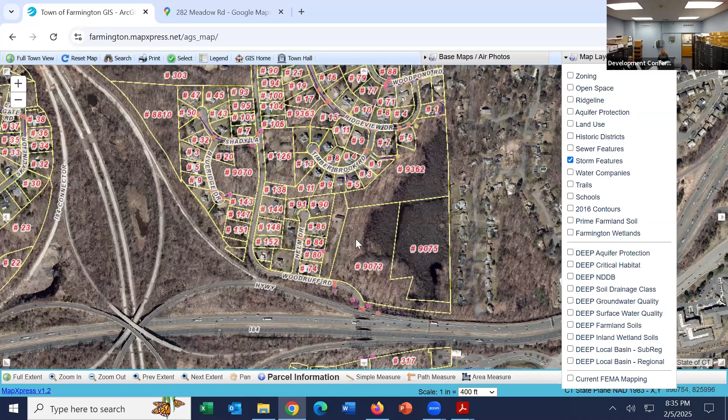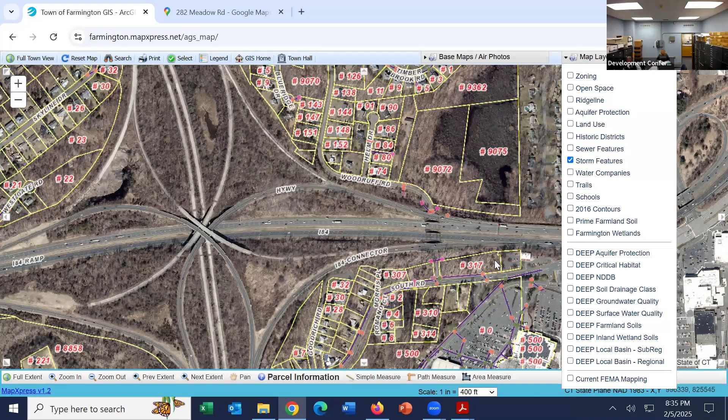I also want to touch base on the quality of it. Yes, it does take some water from 84, but I know this wetland very well from walking it many years ago with the subdivision to the north. Wood Pond is right here, Timberbrook, there's a very large wetland here. This wetland drains underneath 84 into this swale, comes around, goes back under Woodruff, then comes back through here. So there is a very large drainage area - it's fed by a large wetland. Exactly, so really 84 was built through the wetland and cut the wetland off. That's what's happening now - you've got a large amount of water that goes through here. So it is very large.

I stand corrected. No, it's fine, I just want to make sure that was clear to everybody because I know it well from walking it over the years. I've seen lots of outlets from highway runoff, and you see oil slicks and garbage and all sorts of stuff that goes into catch basins on the highway and comes out there. So it's not really adding to it, but pretty - you know.

One other quick question - I heard them discuss that the original proposal was 25 feet, and then staff recommended maybe they needed more room. Is that true, or how did that work out? I'll be honest with you, I don't remember. If we did, I don't - again, I'll take that up with Megan.

We talked so many times with so many different people. I don't remember if that was part of it, but as Garrett said, I think the problem is that span pole. You've got that span pole right there, so you could do a funky easement going 20 or 25 feet and then widening it back out, but that span pole is such a tight area that you can't put that sewer line up alongside of it.

Okay, so then we'll look at that. I think the first step is this additional analysis you want, and then if that is not a vernal pool, I think it makes sense to look at some of these other options.

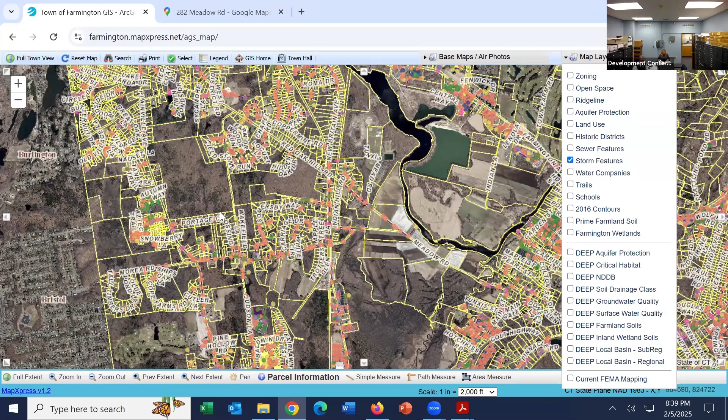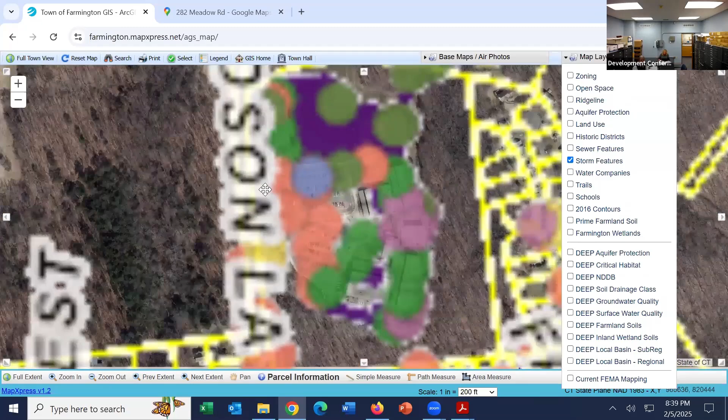So West Woods School had approached us with the changing, with the whole redistricting, and it's not just gonna be an upper elementary anymore. There's gonna be some lower grades as well. They're looking to put, where am I here... here we go, they're looking to put a playscape in there, all right?

And they're looking to put it, let me zoom out, but they're looking to put it in this little bay in here. Okay, so here's the original construction plans. This is the bay we're talking about. Judson Lane is down here, the rear of the property is here. So they're looking to do some work in this bay here. There's a sidewalk and there are wetlands right alongside of the existing cleared area.

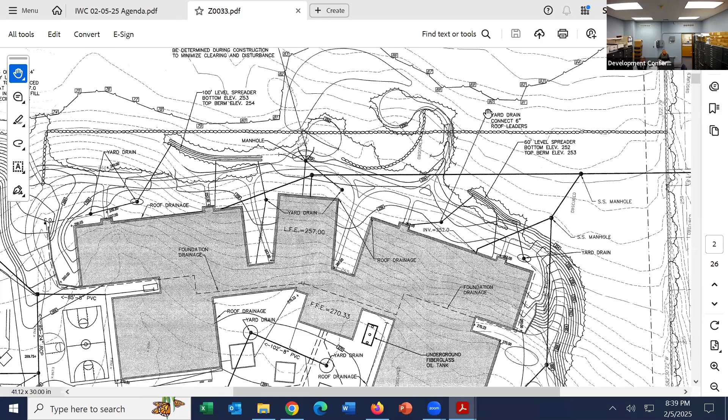All right, so what they're looking to do, this is it here, right? So this is a small playscape for preschool. Yep, exactly. Okay, so what you have here is this back sidewalk and this is the area between the two buildings, so there's a sidewalk and lawn on both sides. Same thing, just a different level. The playscape area will be going in here.

It's an overview, so this is kind of a little schematic of what it would look like. So there would be mulch in here, there's a fence across here, so they would more or less be taking that lawn and bituminous sidewalk and turning it into a mulch area at this point with some playscape features here.

We have discussed this with the fire marshal, and I think it's classified as an exit, so we're coordinating with them on what kind of gate would have to be over here. But for all intents and purposes, that should be easily able to be addressed. It's just this area being converted to a playscape.

It is within the 150-foot upland review area. However, with it being lawn and a sidewalk already, I thought I would run it by the commission to see what they thought, if they feel this is something they would like to see an application for, or if this is just something that we can handle on a staff level.

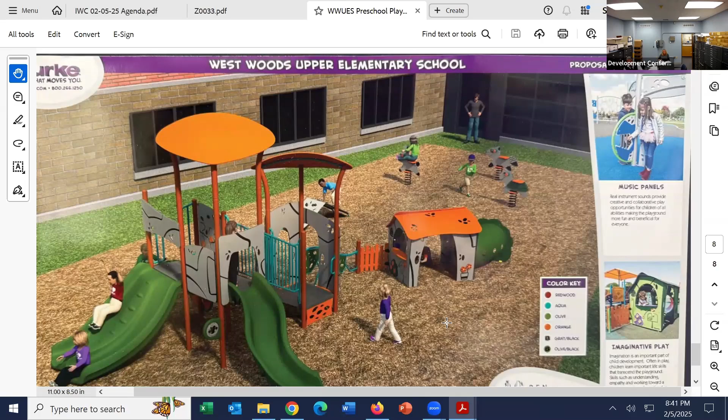I guess what I could do, if you want to approach it that way, we can look at two ways: let staff handle it, and if at some point there's some drainage or under-drains involved, we could definitely bring it back to the commission as we go further along.

I think that would be appropriate. I don't anticipate any need for drain. I imagine any of the roof drains wouldn't exit on the side of the building - they'd be going off the back somewhere. I'd have to look at the collector pipes, but I don't think there's anything here that runs through a collector pipe system.

I certainly think it's something the town staff can handle, but we'll poll the commission. Richie, you think this is something the town staff can handle? Yeah, I guess so. It's already in a developed area in between the building.

Dave Fox: Yeah, I'm confident they could. Robert Eisner: Yeah, agree. The magnitude of the impact when the school was built there was substantial, so this one I think is all Bruce, and I appreciate the fact that he brought it to us. Neil Kelsey: I agree, and Bruce, we're here if anything comes up and you need our input.

Mark Simpson: Yeah, I can agree the town can do the work. When this school was put in, there was limited athletic fields and areas of activity outside, so this might be a positive thing if they can do it.